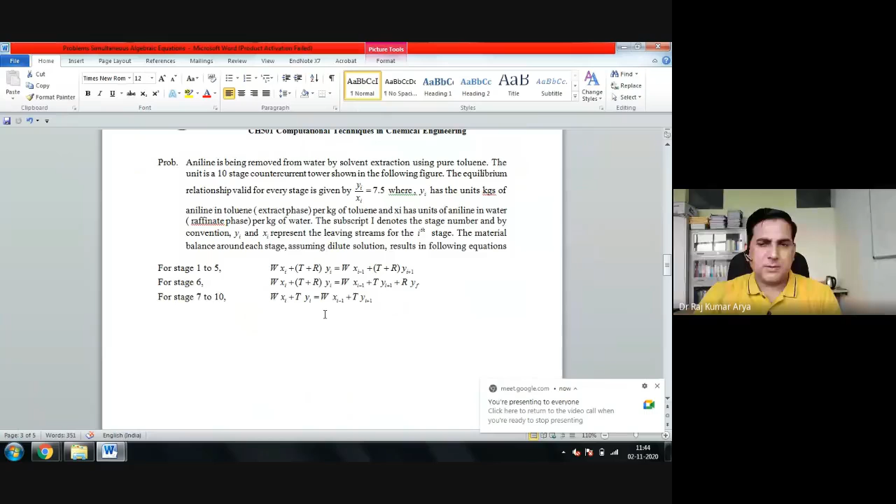So can you see now? Yes sir. So this is actually you have another column in the category of simultaneous algebraic equations there. So here you have...

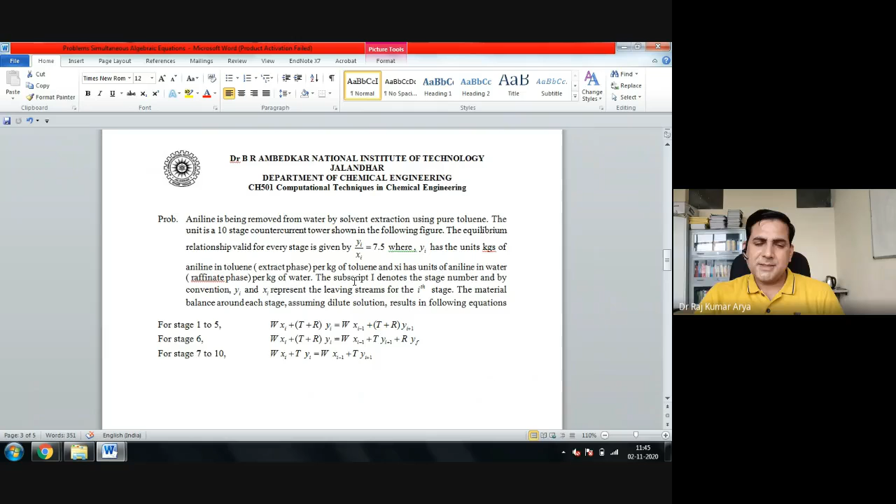Aniline is being removed from water by solvent extraction using pure toluene. The unit is a 10-stage countercurrent tower shown in the following figure, so that you will see later. The equilibrium relationship valid for every stage is given by yi upon xi equal to 7.5, where yi has units of kgs of aniline in toluene, extract phase per kg of toluene, and xi has units of aniline in water, raffinate phase per kg of water. The subscript i denotes the stage number, and by convention yi and xi represent the leaving streams for the ith stage. The material balance around each stage, assuming dilute solutions, results in the following equations.

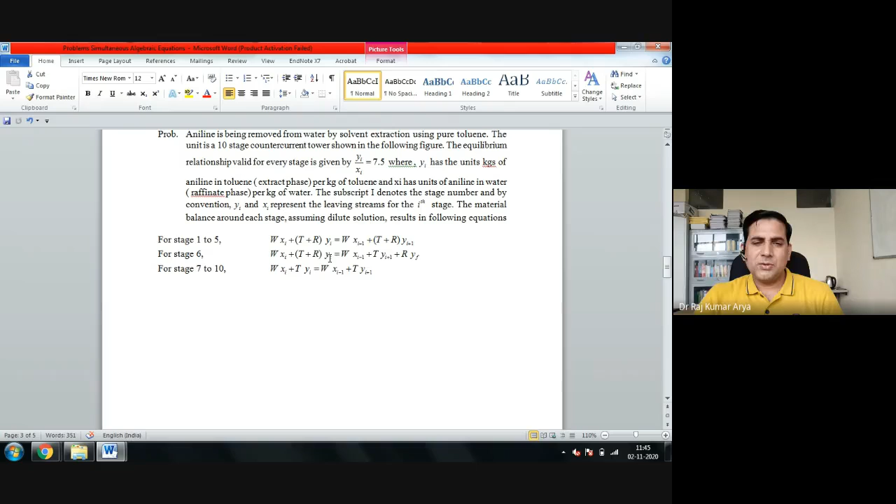So these are your material balance equations here. You can also write them, but you will see this. I will show you the figure, then you will have to cross check whether you are getting these equations or not. So stage 1 to 5.

So let's see what stage 1 to 5 is. So this is what you have here.

Here you have water entering from top, and this is what you are getting here, something R, the recycle part or something. So you have an R, you are feeding a 30 kg first.

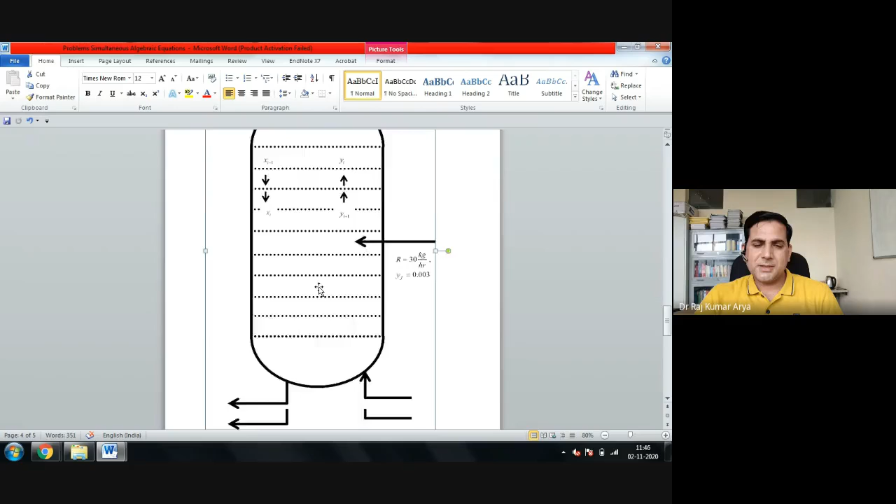So this is your condition where you are feeding. Here you are feeding water. In the bottom, you are feeding pure toluene, which you are pumping from bottom. And what is toluene doing actually? Toluene is actually extracting your aniline from the water phase.

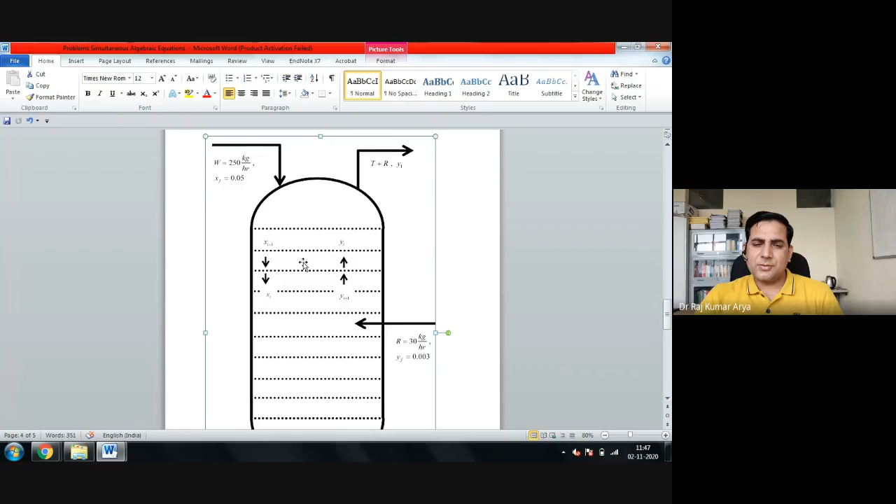So you have water here where it has its feed composition 0.05. So you are feeding that, and here you are just feeding an R. What is R here? R is actually your raffinate phase here, so you are just continuously feeding here.

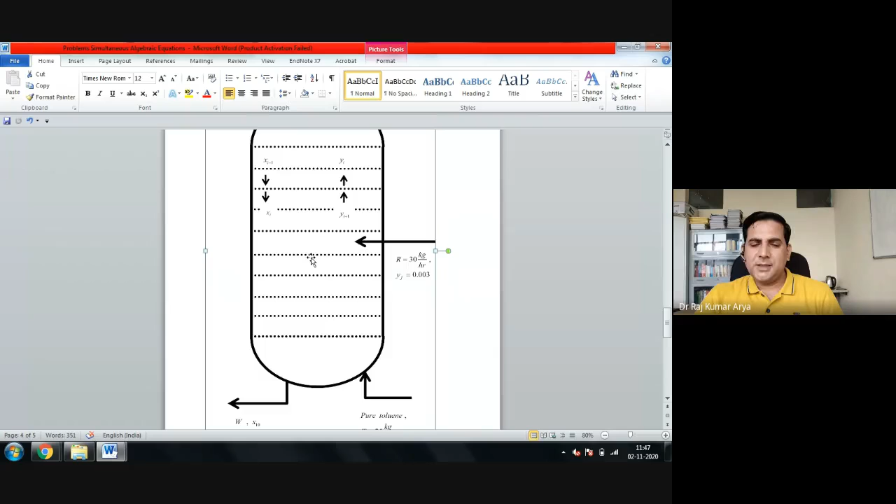That is plate number 6. So first part is that you have to write a material balance equation for this particular column. So I hope you might have seen an extraction column in your mass transfer course or not.

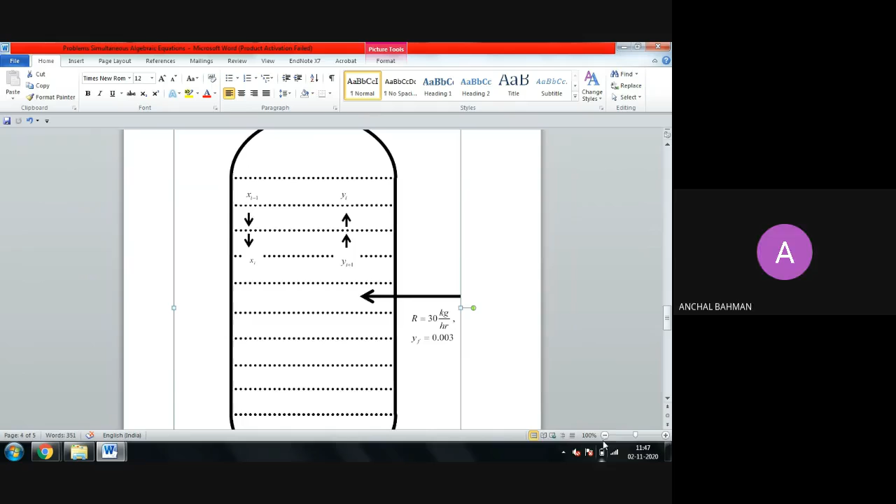Sir, shouldn't R be reflux? It is not a distillation column. Sir, but reflux from the distillation column top we are getting. Sir, but from the top we are getting T plus R, so that R is coming below. No, whatever you have to pump, that should go up actually, no? Depends what material you have. Okay sir, got it.

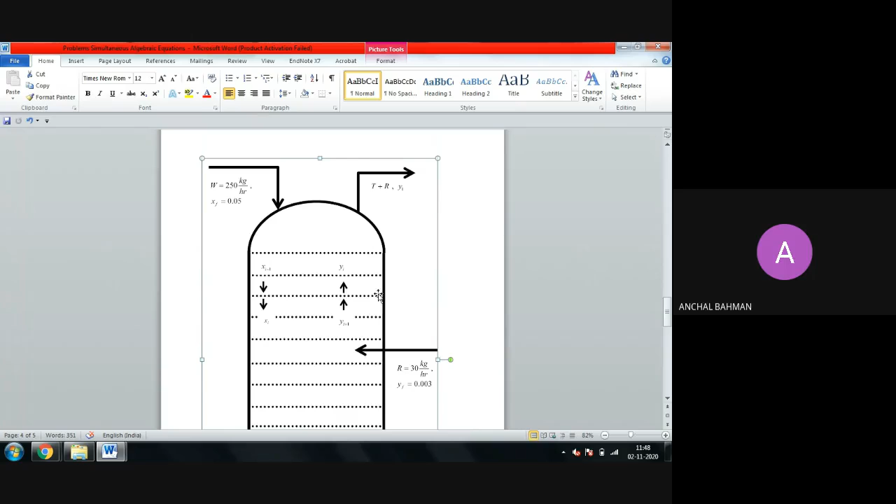Okay, yes sir, got it. You are feeding toluene, you are feeding this R and toluene, yes sir, going to the top only. And whatever water you are feeding, that is going down here into that water phase.

So this is your 10th stage, that's clearly mentioned here, X10 here. So this is your 10th plate. This one is your starting plate here, so plate 1, from where you are entering your feed.

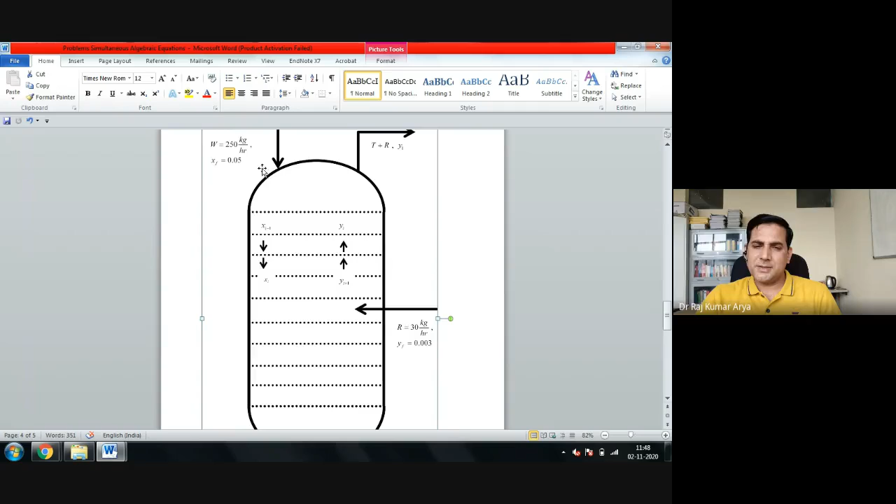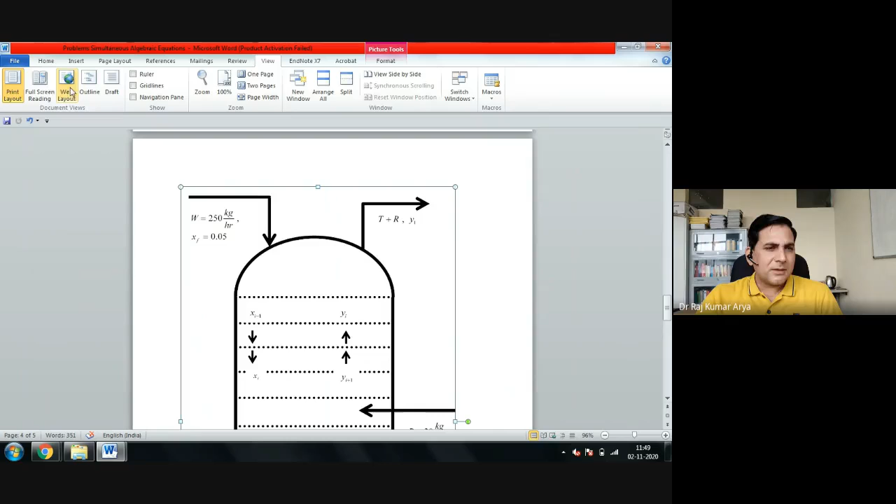So can you please zoom out a bit so that we can see the whole column at once? Yeah, so I am doing that only. Now it's going to 2, but I want to show you a single page. One minute, how to go to this full screen? Is there any way? Yeah.

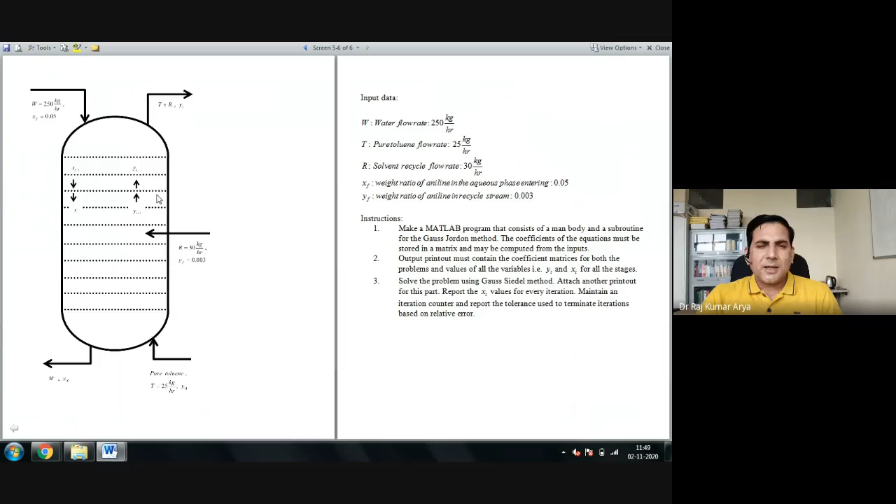But I want only one page at a time. I hope can you see that? But I don't want this actually, single page. So we can see, this is fine now, right?

So this is what your extraction column is. So here you are having some material here which contains your aniline here. And now you are just passing here, and then, this is your material here which is being extracted with your toluene here.

So you are just putting toluene as bottom material from here, and then you are passing it upward, and it will extract some amount of component from here, from this feed, and whatever is coming here for the raffinate part, you are pumping at the fifth plate, right? That's what they mention there, after the fifth plate.

So if you will write a mass balance, let's say for this first plate here, just write what is coming into this and what is going out from here.

So this component is coming in here, first one. This is coming with a feed composition XF here, and now this is coming.

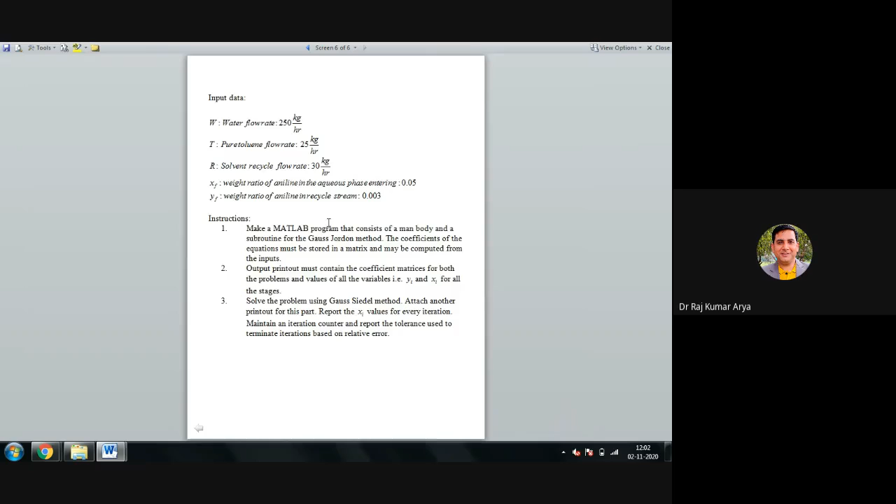At this particular plate, plate 6, your plate is something like that. Fine. You have a plate there.

Now what is happening after that? What happened to this my video? I can't see what I'm talking. Can you see my video? It's off actually. Yes, sir, it's freeze. But yes, the video is visible, but it's frozen. I don't know what happened. So what to do?

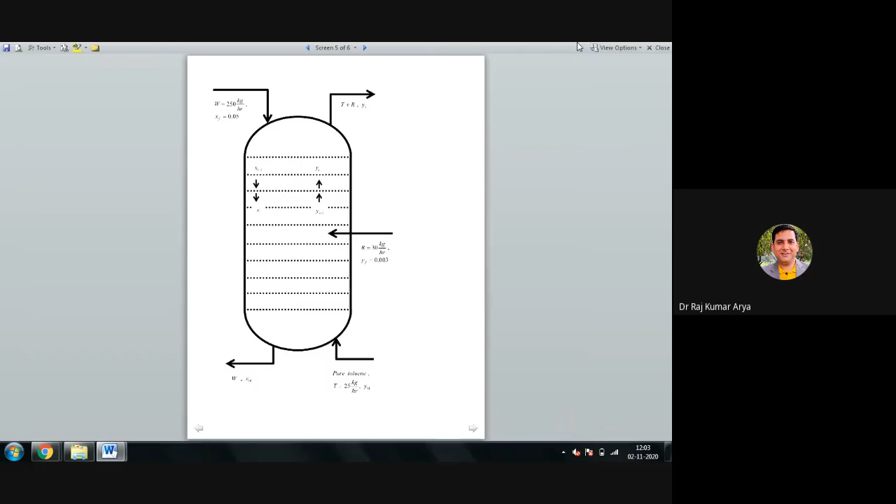Now I think it's fine now. Yes sir, it's fine. Yes, sir. So what you have a plate.

Now from here, as you know that something is coming from top side, that's fine. Something is going down, that is also fine. Something is already coming in from the bottom, that is also fine. Now what happened from here?

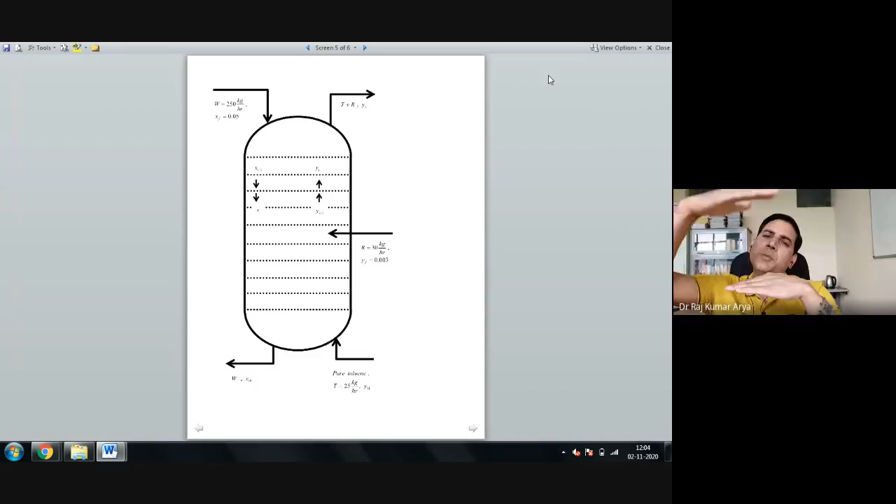Yes or no? Yes, sir. Okay, so whatever is fed there, it went straight forward upside. It was not going downside.

So this much material you added, but it's going in upward side. Okay, sir.

So that way, can you expand these equations actually, or can you try to write it, because it might be possible that I might have done wrong here, because it's not a 100% rule thing that I might have done everything correct. So you just think, you just write equation for let's say this is your plate one.

Make a column, just like this only. You write the equation because it might be possible that time I might be writing in I and J thing wrong also. So this is one way to cross check.

So you have this column only where XF and YI are your aniline composition. Practically you are doing the aniline balance only. Fine.

Okay, so can you write equation? Let's say this you give plate number one. So you just write for plate number one. Same way you write plate number 2, 3, 4, 5, 6, 7, 8, 9, 10 equation.

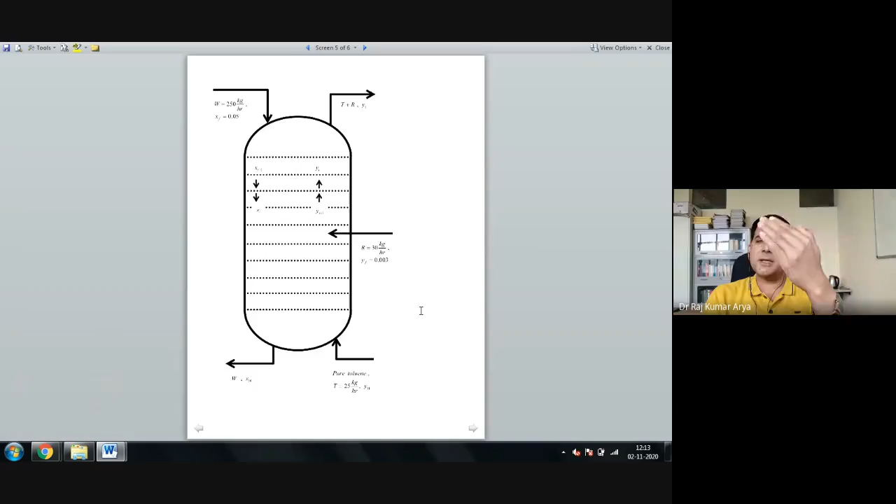Hello, can you hear? Yes sir. Whatever is coming to plate 1, in terms of y side, that is coming from stage 2, so that is your y2 coming into plate 1 in terms of y.

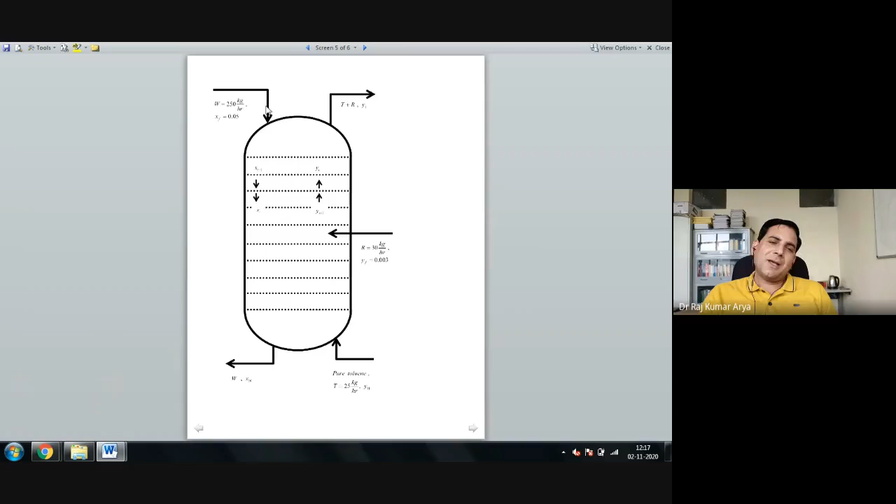If you are talking about the steady state column, whatever you are feeding - let's say you have this W. Can you read what this W is? Can you read this properly? Yes sir, it is water flow rate. It is water, it's not water plus aniline. Can you see this? Yes sir. So it's water flow rate, so water flow rate will not change. Water would be water.

And sir, if it was water plus aniline, then you have to calculate the component which is getting extracted and all this - you have to balance it that way. But it is water only. Water, okay, whatever is coming is going down only. Okay, same thing for toluene - toluene you are feeding, it's not going out with water, we are just considering that whatever toluene we are feeding will just go out only. Okay sir, okay?

So it's just like that in chemical process calculations. You used to calculate the thing on dry basis, right? Yes sir, sometimes dry basis thing. So this is a type of dry basis only - your water is the solid material thing and that's you are considering as the dry basis. Out of that you have the loading inside, based on water flow rate you have 0.05% fraction of that. So if you multiply 250 by 0.05 you will get the amount of aniline. If you add them up that would be your total flow rate. So in that case you have to consider all those particular parts.

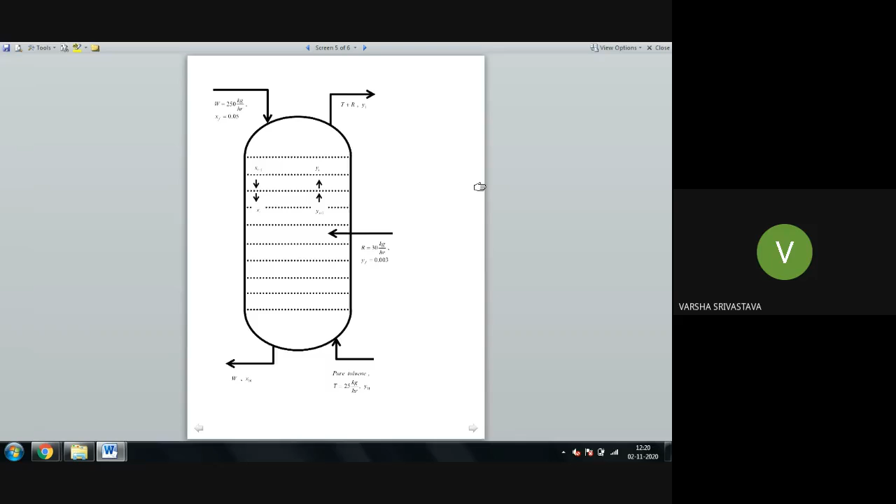Did equation 1 come for you? Can anyone tell what would be the equation 1 for plate 1? Yes sir, is it coming W plus X, W into X0 plus T plus R, Y2 equal to T plus R Y1 plus W X1. Is it coming that much? Yes sir. Okay, same way you can write till your 5th plate.

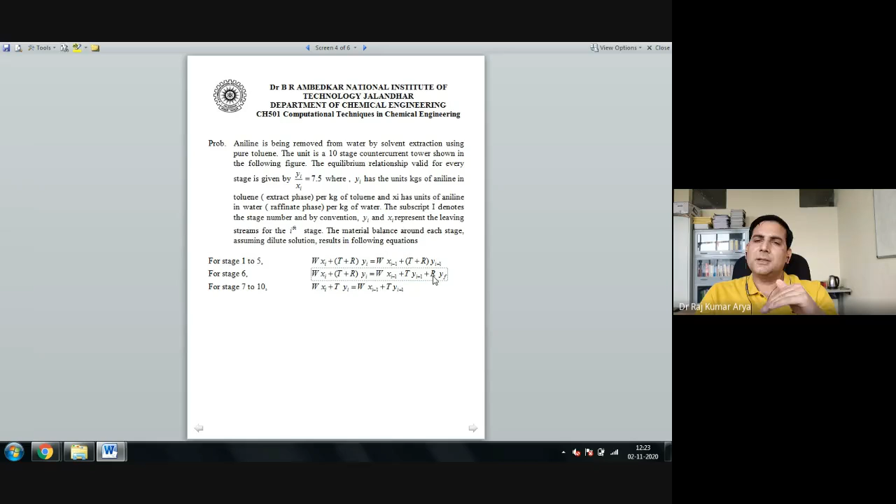Now after the sixth plate, you don't have R, everything else remains. Right? So from the sixth plate onward, whatever you had added, you had added R here. So just cut out the R there. You are not feeding yF also. So in this, you just make R equal to 0 and then this term would automatically go away. Is that fine?

Yes sir. Now in that case once you formulate here you are getting two things. One is getting x0. What is your x0 now? Your x0 is nothing but your xf, right? So you will replace your x0 by xf.

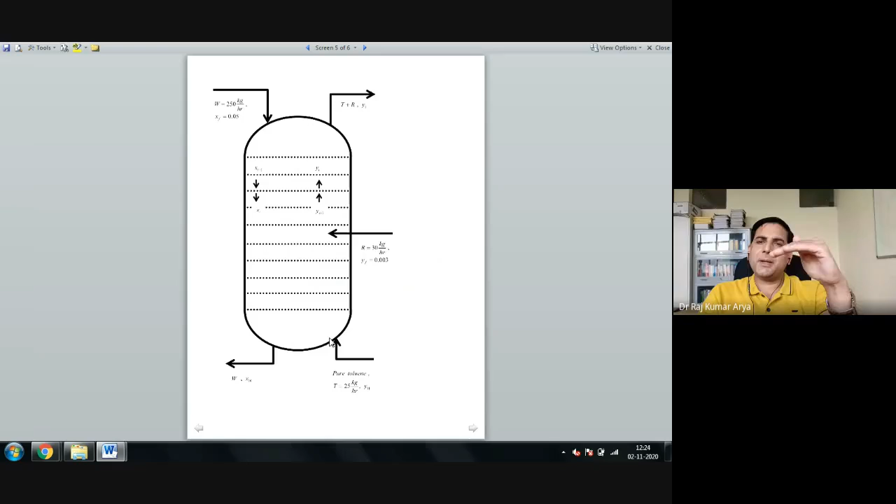y you have already fed there. Now from here you are getting something here y11, right? When you come to the 10th plate, you are having there y11 coming in. The 11th practically here, whatever is coming with toluene feed, right? That is the composition of this pure toluene. So when pure toluene is fed, how much will y11 be?

Y is composition of - we are doing this balance completely for aniline. So in pure toluene, how much will y11 be? Zero, right? So you have everything, right? You have W, you have your T, you have your R, and what would this y1 be then? This y1 - would it be known or unknown to you?

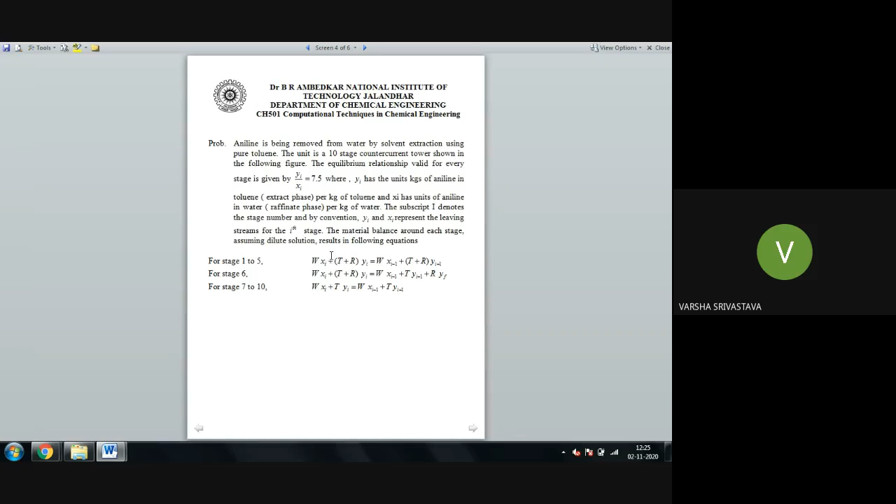All you have here is xi and yi. So xi and yi relation you have from here. So you can convert either xi into yi or yi into xi. Choice is completely yours. So you will get 10 here. You can convert this in terms of yi if you want.

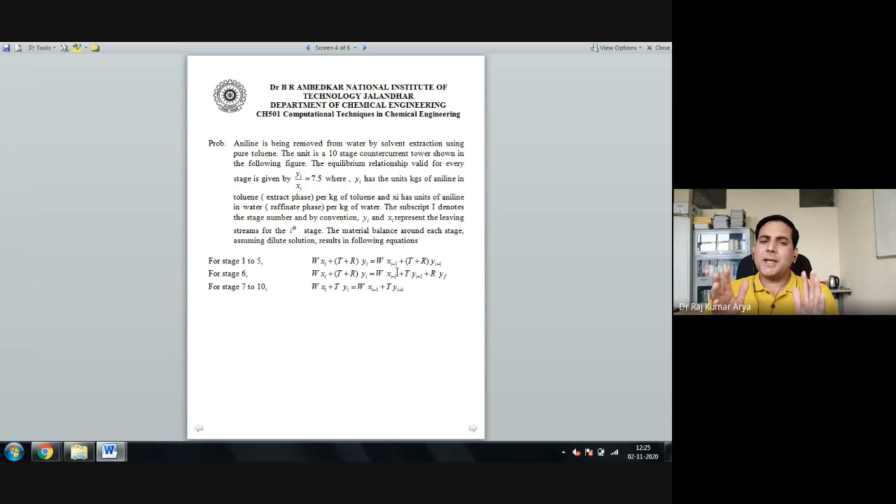Then can we calculate composition on each plate? That's what we want to calculate here. The problem statement further is: make a MATLAB program that consists of a main body - just a main program and a subroutine for Gauss-Jordan. So here I want to calculate it by Gauss-Jordan, but you can solve it by Gauss-Jordan or Gauss-Seidel. Programming, if you make it for one, it would be same for all.

The coefficients of equations must be stored in a matrix, which you will already do once you make the program. Output printout must contain the coefficient matrix for problem-solving values yi and xi for all stages. So at all stages you have to calculate yi and xi, meaning you have to calculate the equilibrium composition leaving that particular plate. Solve the same thing by Gauss-Seidel, another printout of that, and note the number of iterations.

So you can solve it by two methods. For you, everything is given - the equilibrium relation is given to you. You just have to calculate the equilibrium compositions at all stages.

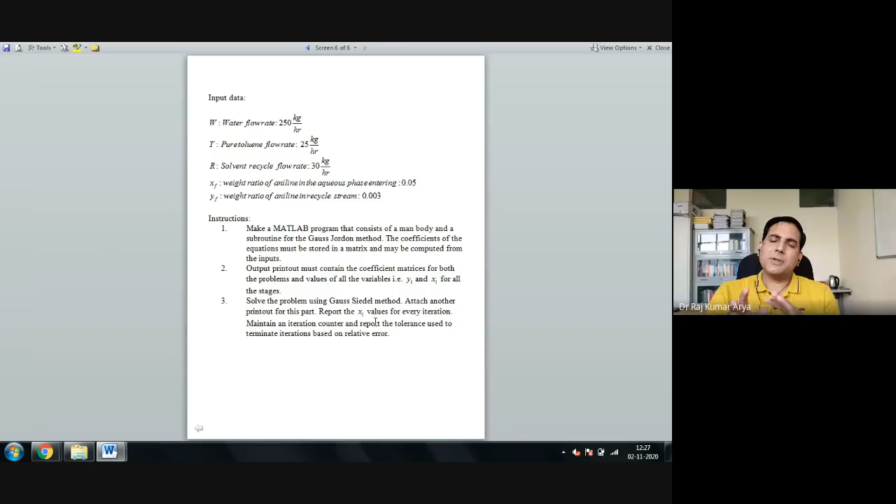The other type of problem could be that you change this problem. Let's say you have fixed up somehow your top composition. Rest of the things you know. You may be asked to calculate the number of plates.

So you can change your number of plates, or change the location of the feed - at what place should I insert the feed so that I can get this desired value? Or let's say one person says, no, I will feed it at plate number 6. Now your only choice is to increase or decrease the plates in the top column only, right? Top part, yes or no?

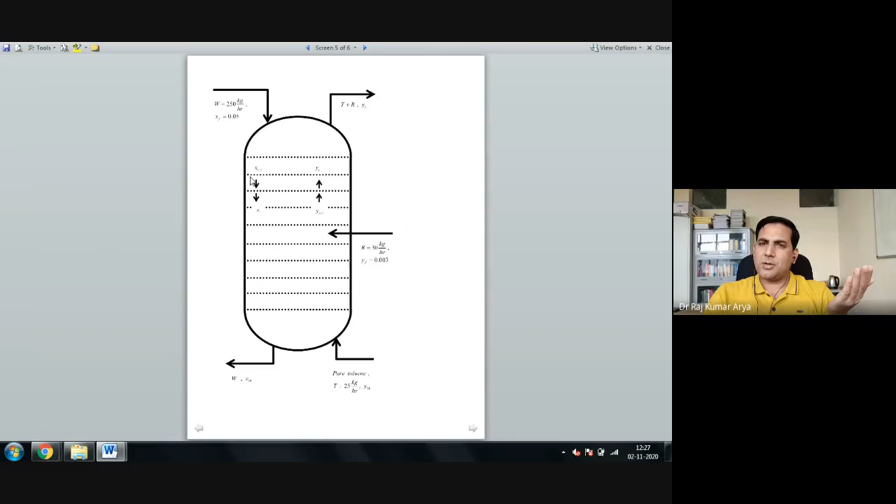Yes, sir. That is the variable you can keep changing till you get your desired concentration on top. Or if you want to make it two-way, I can adjust both - not only the plates, I will also adjust the location of the feed, because as per mass transfer knowledge, I can alter this composition either by increasing the number of plates or by changing the location where I am inserting the fresh material inside the column. Correct or not?

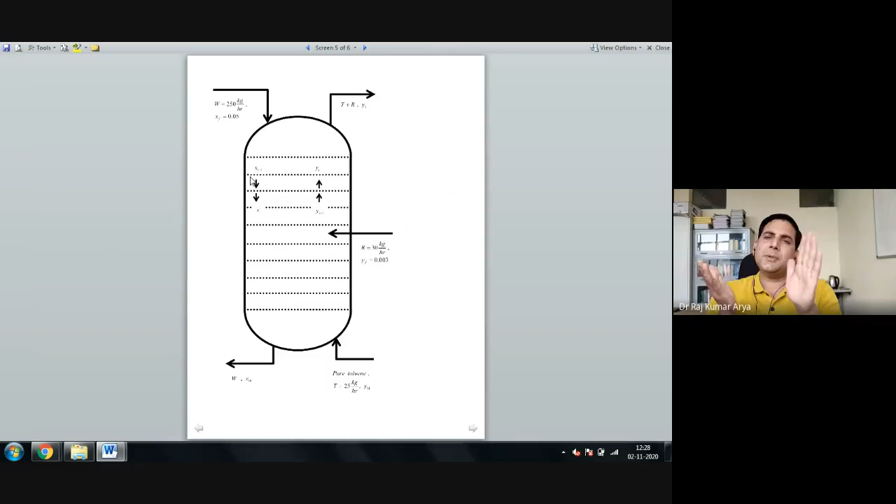So this is also the same type of problem. Here also you end up with simultaneous algebraic equations that can be solved with the same program we made for the previous one. So I would say just complete the previous one first, and if you get any problem in that, we will discuss it.